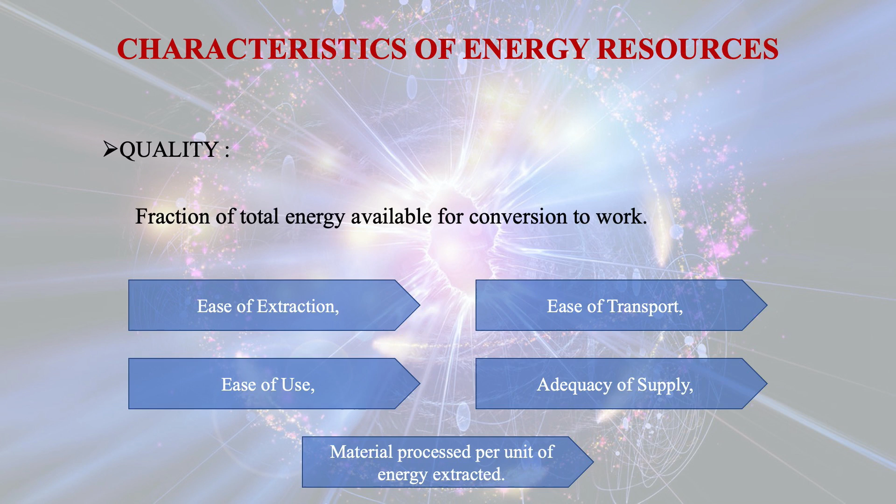The non-renewable energy resources essentially include fossil fuels: coal, oil and gas. These were formed over a period of millions of years, and even though they are being formed even today in special geological environments, their rate of formation is so slow that it is practically meaningless in the context of human lifespan.

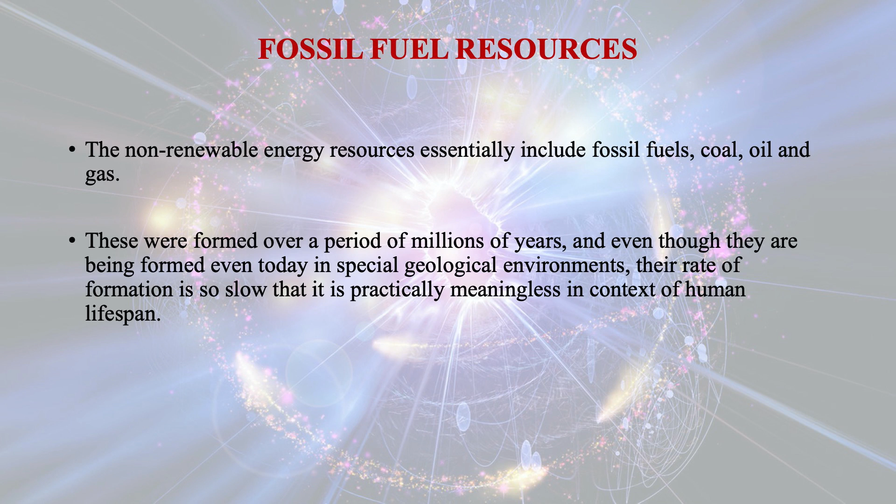Coal is formed from the remains of vegetable matter. Most of the world's coal resources represent accumulation of plant material in swamps. There is a progressive metamorphism of the organic material from peat through lignite and bituminous coal to anthracite. The carbohydrates are first converted into hydrocarbons and then to elemental carbon. Coal is essentially mined by three methods: underground mining, strip or surface mining, and auger mining.

Coal is the most abundant commercial energy source in India. Indian coals are largely of bituminous grade, and an estimated 99.5% of indigenous coal resources are in the Gondwana basin. Indian coals usually have a high ash content, up to 50%.

Ash comprises residual non-combustible matter that comes from silt, clay, silica, etc., which may have contaminated coal at the time of deposition and formation. The sulfur content of Indian coals is usually low. Owing to the generally poor and deteriorating quality of Indian coal, beneficiation processes such as coal washing assume importance.

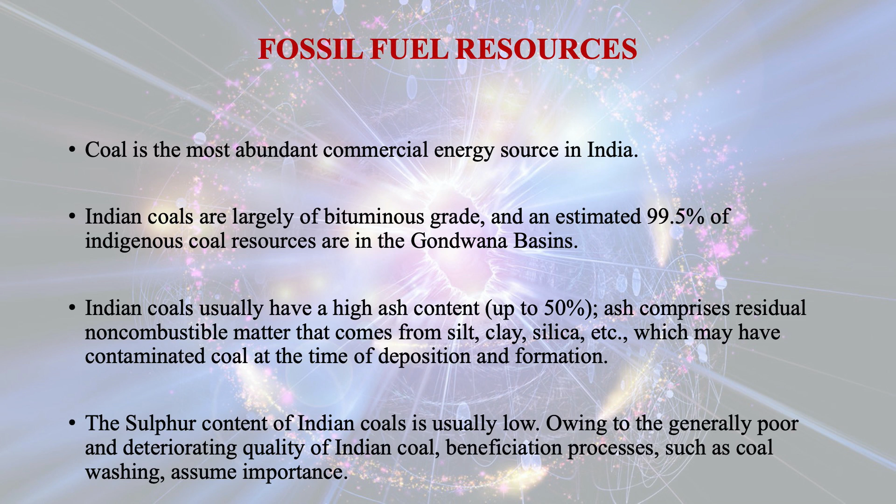Petroleum and natural gas are often found together and are almost entirely limited to sedimentary rocks and to special geological circumstances. Crude oil consists almost entirely of liquid hydrocarbons with some gaseous hydrocarbons dissolved in them. It is lighter but more viscous than water. Tar and asphalt are semi-solid to solid forms of crude oil.

Natural gas consists of hydrocarbons simpler and lighter than those of crude oil, with the most abundant hydrocarbon being methane. Sulfur is an undesirable impurity in both crude oil and natural gas. High sulfur crude oil and natural gas are known as sour crude and sour gas, reflecting the odor of hydrogen sulfide, and contain more than 0.5% sulfur by weight.

In recent years, India's energy consumption has been increasing at one of the fastest rates in the world due to population growth and economic development. The utility electricity sector in India has one national grid with an installed capacity of 371.977 gigawatt as on 31st July 2020. Renewable power plants constitute 35.94% of total installed capacity.

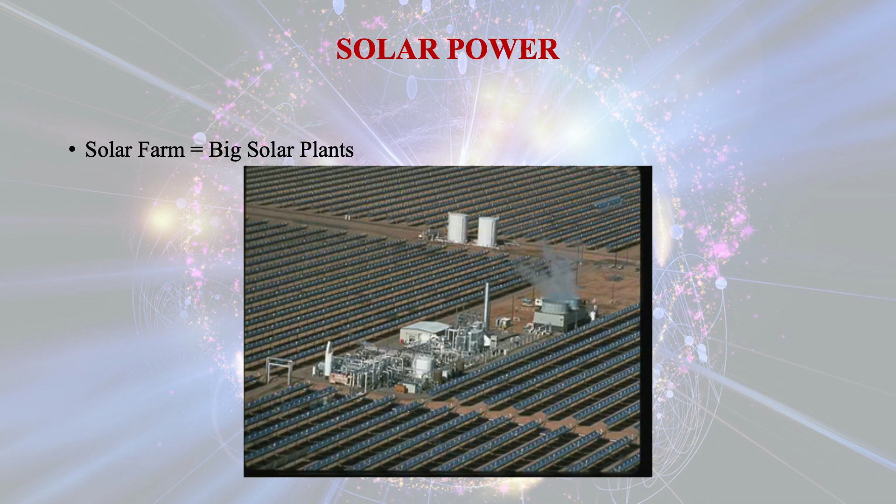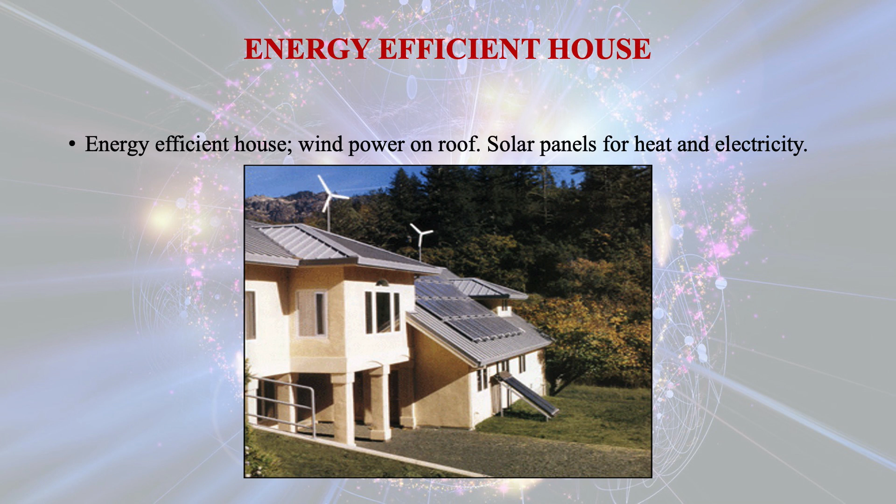The major disadvantage of solar power, that is PV type only, is that it cannot produce electricity during the night and also during cloudy daytime. In India, this disadvantage can be overcome by installing pumped storage hydroelectricity stations.

India has the fourth largest installed wind power capacity in the world. The development of wind power in India began in the 1990s in Tamil Nadu and has significantly increased in the last decade. As of 31st March 2020, the installed capacity of wind power was 37.69 gigawatt spread across many states of India. The largest wind power generating state is Tamil Nadu, accounting for nearly 23% of installed capacity, followed in decreasing order by Gujarat, Maharashtra, Rajasthan and Karnataka.

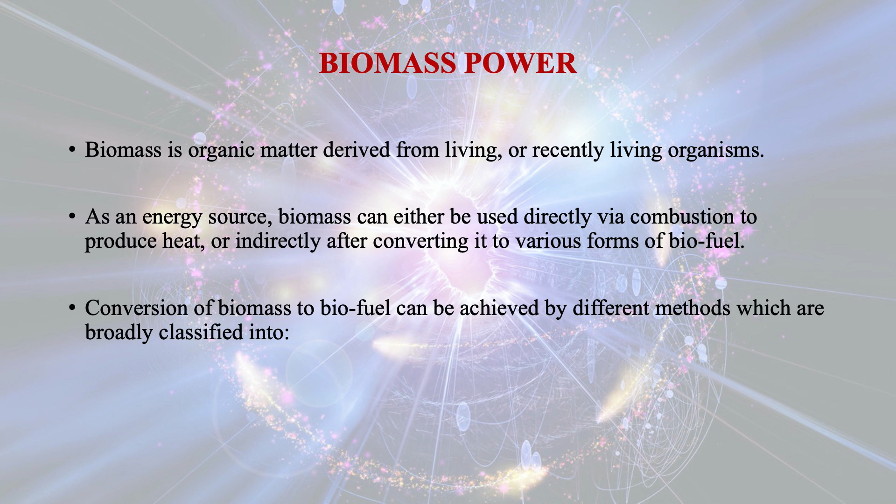Biomass is organic matter derived from living or recently living organisms. As an energy source, biomass can either be used directly by combustion to produce heat or indirectly after converting it to various forms of biofuel. Conversion of biomass to biofuel can be achieved by different methods, which are broadly classified into thermal, chemical and biochemical methods.

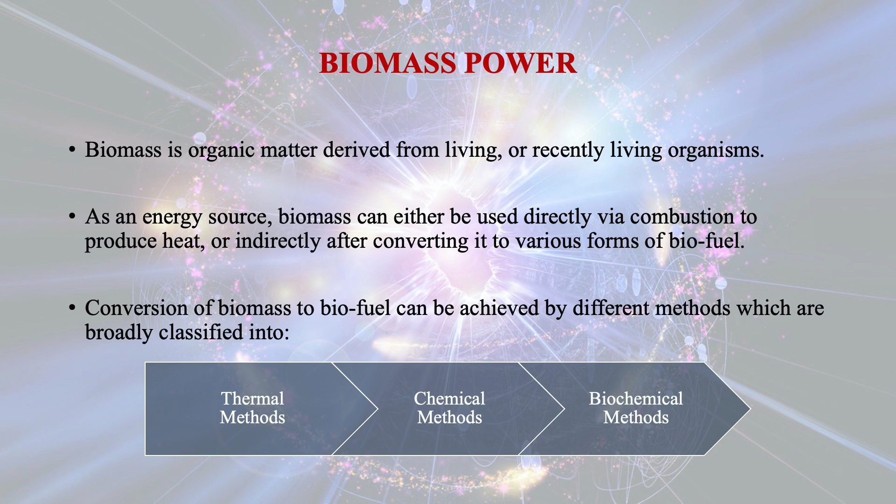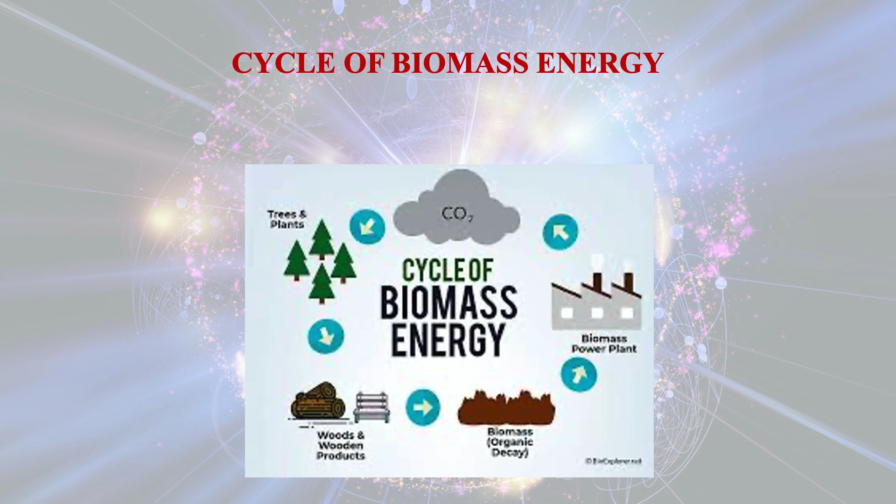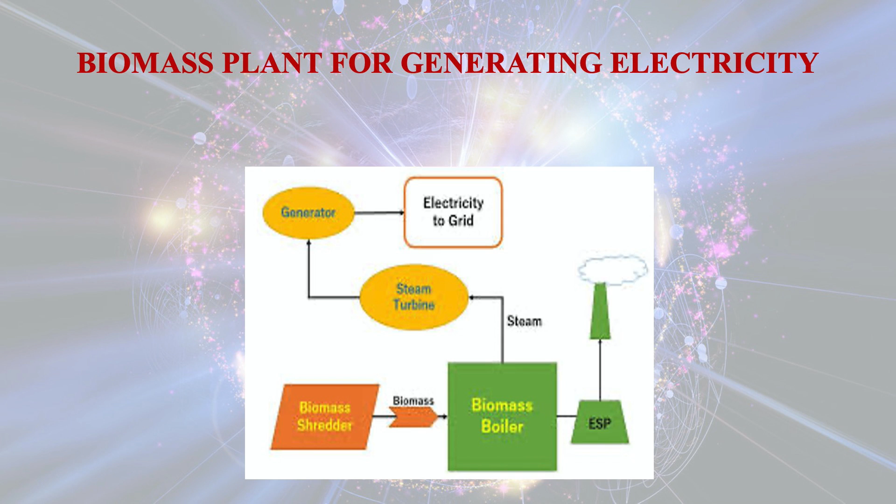Now let us discuss geothermal power. What is geothermal power? Geothermal power is power generated by geothermal energy. Technologies in use include dry steam power stations, flash steam power stations and binary cycle power stations.

Geothermal power stations are similar to other steam turbine thermal power stations. For instance, heat from a fuel source. In the geothermal case, the Earth's core is used to heat water or another working fluid. The working fluid is then used to turn a turbine of a generator, thereby producing electricity. The fluid is then cooled and returned to the heat source.

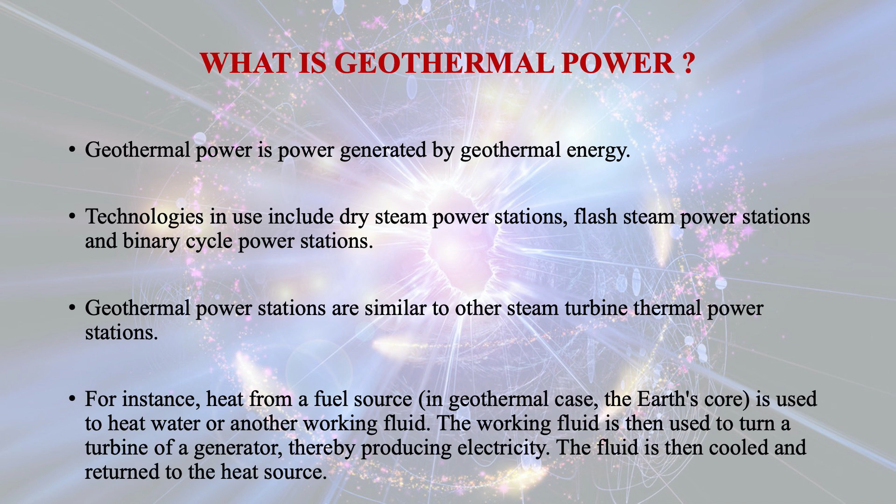Why is geothermal energy considered to be a renewable source of energy? Geothermal power is considered to be a sustainable renewable source of energy because the heat extraction is small compared with the Earth's heat content. The greenhouse gas emissions of geothermal energy stations are on average 45 grams of carbon dioxide per kilowatt hour of electricity, or less than 5% of that of conventional coal-fired plants.

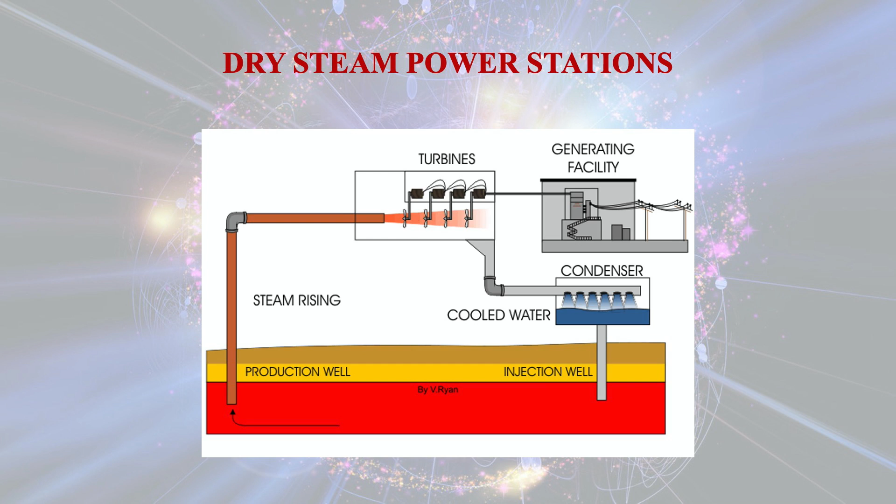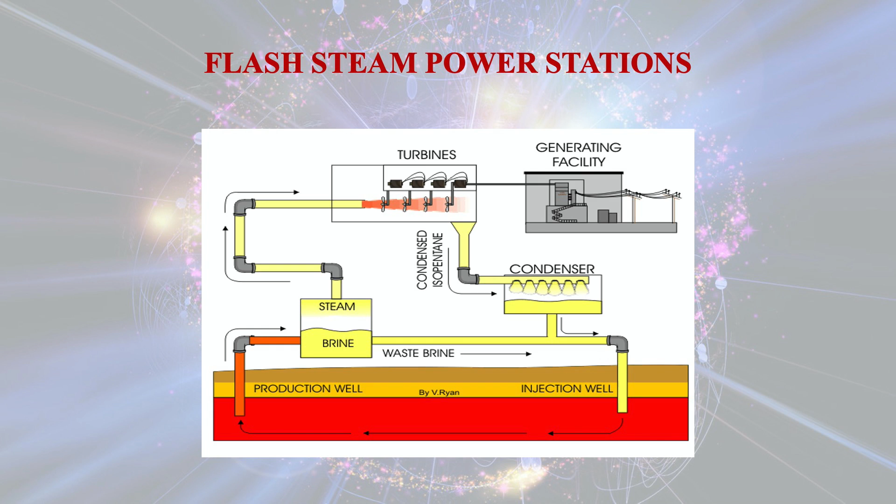So immediately the steam will be generated because of the low atmospheric pressure, and that steam will pass through the turbine, and in turn the generator will produce electricity. After that, the low pressure, low temperature steam comes out from the turbine, and as usual it will pass through the condenser and convert into liquid water, and then the liquid water will return to its initial state.

and since the boiling point of the binary fluid is low, it will immediately boil after taking heat in the heat exchanger, and the vaporized binary fluid will enter the turbine and expand there. The shaft of the turbine is coupled with the shaft of the generator which produces electricity. The low pressure, low temperature binary fluid comes out from the turbine and passes through the condenser, converting into liquid form, and then it will again extract heat from the hot fluid flowing through the heat exchanger and complete the cycle.

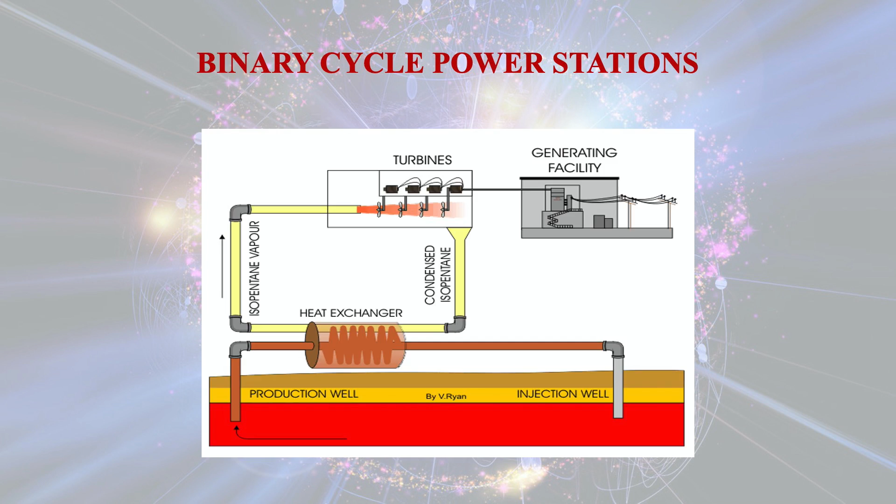Geothermal energy is thermal energy generated and stored in the earth. India's installed capacity of geothermal energy is experimental and commercial use is insignificant. According to some ambitious estimates, India has a potential of 10,600 megawatts in the geothermal provinces, but it still needs to be exploited. India has potential resources to harvest geothermal energy.

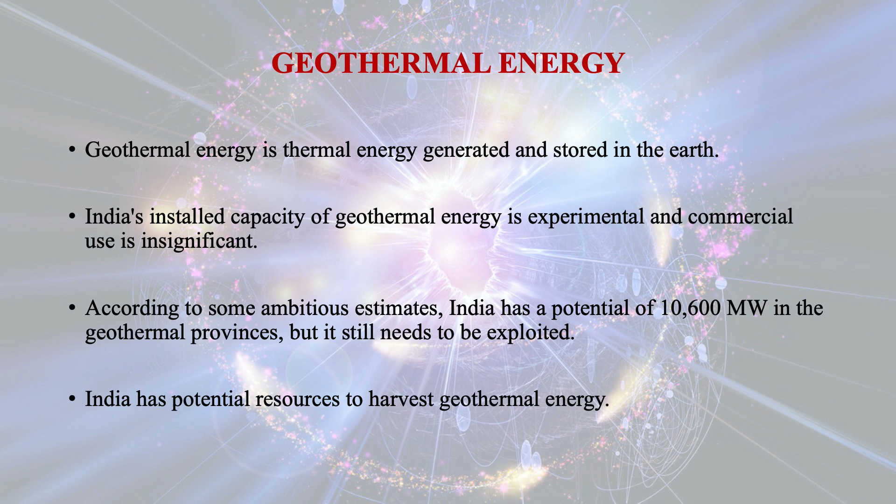Let us discuss tidal energy. It is also one of the important renewable sources of energy. Tidal power, also called tidal energy, is a form of hydropower that converts the energy obtained from tides into useful forms of power, mainly electricity. Local effects such as shelving, funneling, reflection and resonance can increase the potential of tidal energy in certain regions.

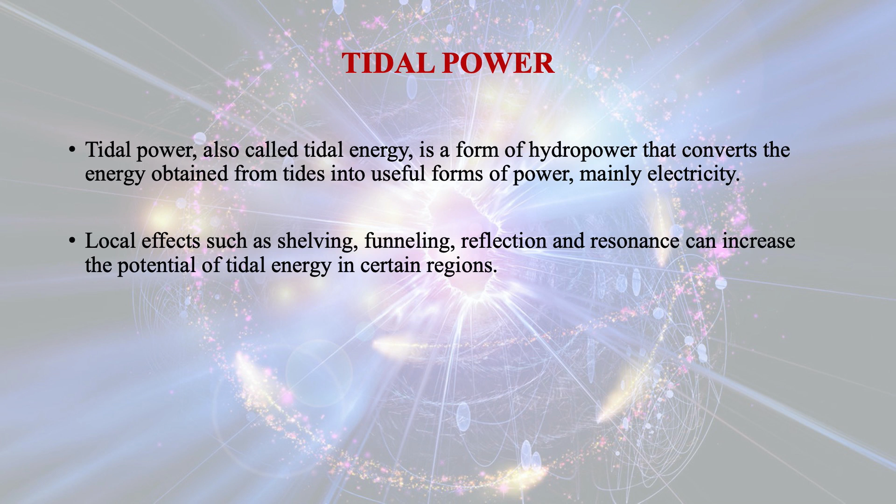Now let us discuss nuclear power. As of 31st March 2020, India had 6.78 gigawatt of installed nuclear power generation capacity, or nearly 1.8% of total installed utility power generation capacity.

India's nuclear power plant development began in 1964. India signed an agreement with General Electric of the United States for the construction and commissioning of two boiling water reactors at Tarapur. In 1967, this effort was placed under India's Department of Atomic Energy.

In 1971, India set up its first pressurized heavy water reactor in collaboration with Canada in Rajasthan. In 1987, India created Nuclear Power Corporation of India Limited to commercialize nuclear power.

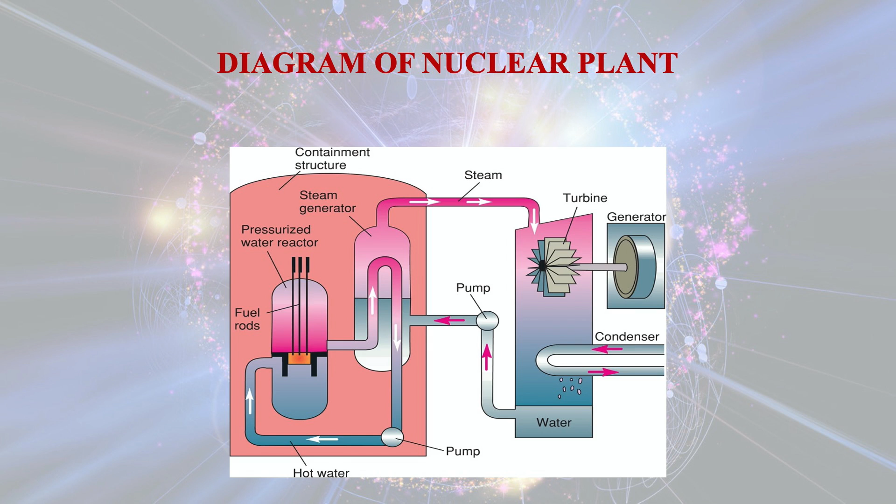giving heat to the steam generators, and thereby steam is formed in the steam generators, and that steam passes through the turbine, in turn producing electricity. The low pressure, low temperature steam coming out from the turbine passes through the condenser, is converted into liquid water, and is sent back to the steam generator with the help of a pump.

Fuel cell. A fuel cell is essentially a battery in which the reactants are continually supplied to the electrode and the products are continually removed. They are much more efficient than heat engines in terms of generating electricity. The most common type of fuel cell is based on hydrogen.

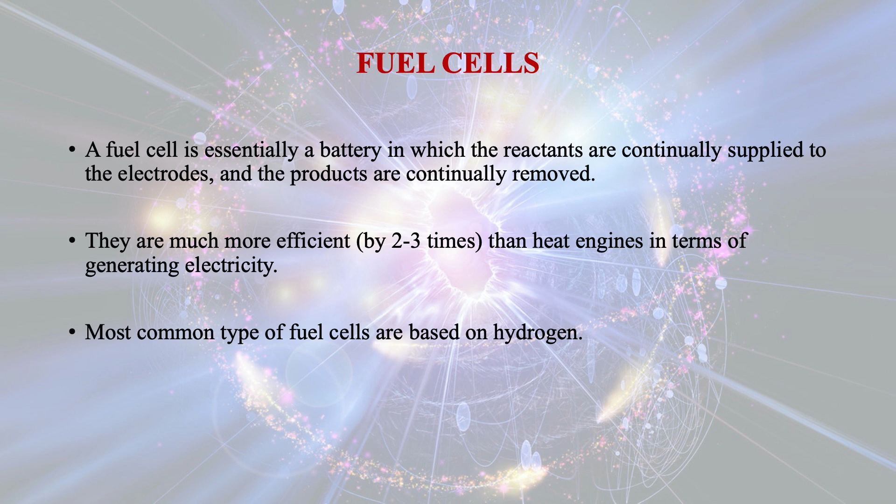Fuel cells are scalable. Large ones can power homes or neighborhoods. Small ones can be used in appliances. Distributed generation is a decentralized power system consisting of hydrogen generators and fuel cells.

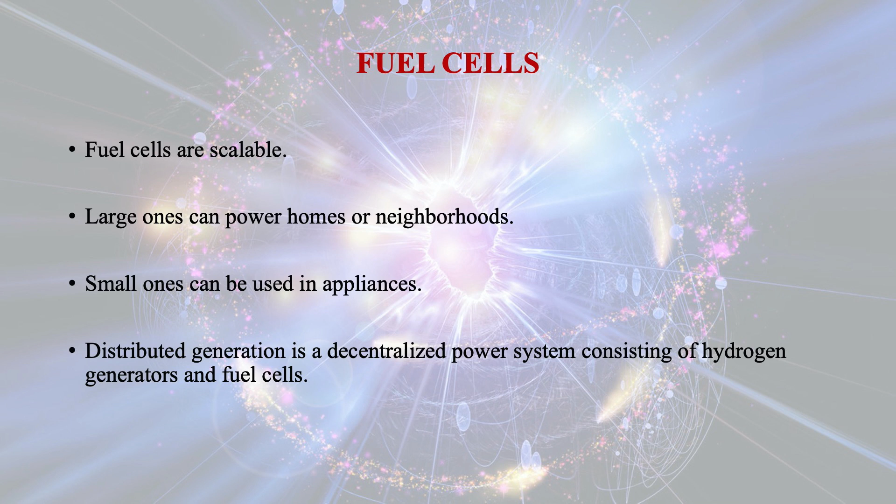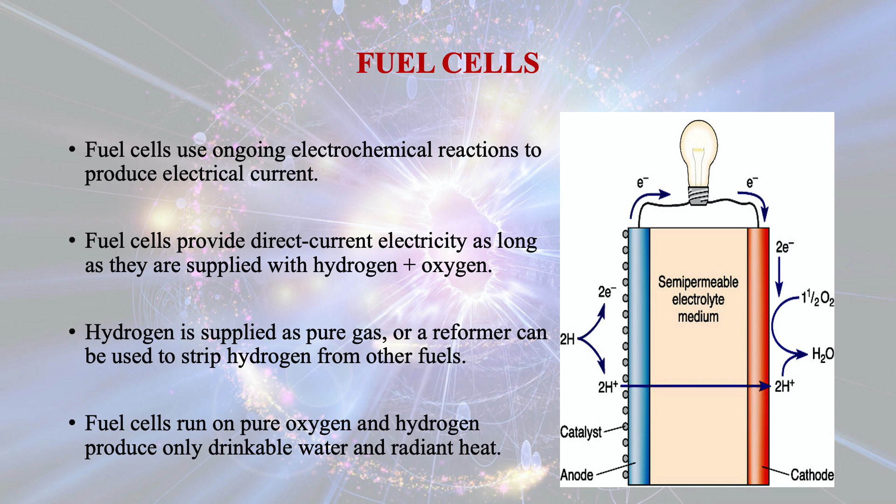Now hydrogen gas is supplied to the anode, thereby forming hydrogen ions and electrons; two hydrogen ions and two electrons are formed from one molecule of hydrogen. The hydrogen ions pass through the electrolyte from anode to cathode, and the electrons pass through the outer circuit, producing electricity, and that's why the bulb will glow.

And at the cathode oxygen is supplied, and oxygen plus hydrogen ions plus two electrons form water, that is H2O. So this is the process for the fuel cell which produces electricity. At the same time it also produces drinkable water as a byproduct.

Now, as we all know, the commonly used power plants are thermal power plant, nuclear power plant, hydro power plant, gas turbine power plant and combined cycle power plant. In our earlier lectures we discussed in detail the process for the thermal power plant, and we saw that there are four important components: boiler, turbine, condenser, and pump.

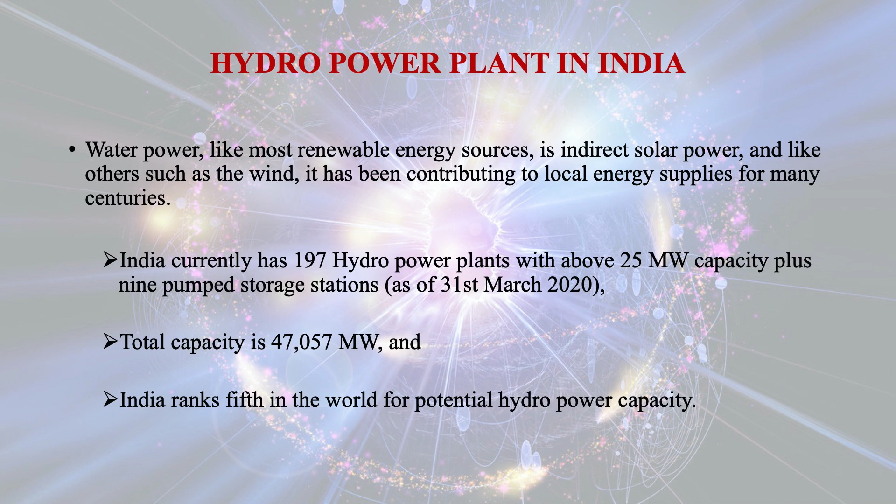The main sources of electric power generation are thermal, hydel and nuclear power plants, but there are still many other non-conventional sources of power available. Those non-conventional sources like wind power, solar power, MHD generation, fuel cells, etc. are becoming promising alternative sources for electric power generation.

Renewable energy sources offer a viable option to address the energy security concerns of a country. Today, India has one of the highest potentials for the effective use of renewable energy. India is the world's fourth largest producer of wind power after Denmark, Germany and USA. There is significant potential in India for generation of power from renewable energy sources: small hydro, biomass and solar energy.

We have discussed energy resources. Let us very quickly summarize our discussion. We have discussed the concept of energy resources, the demand and supply scenario, the electricity sector in India, and the various renewable sources of energy.